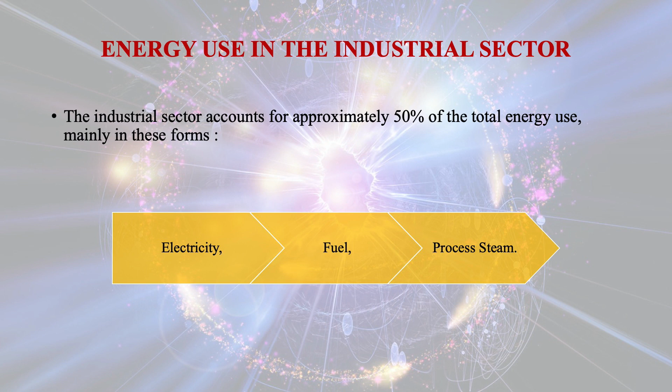Now let us discuss about classification of industrial energy use. Standard industrial classification: primary metal industries, chemicals and allied products, petroleum refining and related industries, food and kindred products, paper and allied products, stone, clay, glass and concrete products.

Major energy intensive industries are aluminum, ammonia, cement industries, iron and steel industries, paper industries, petroleum and refining, and sugar industries.

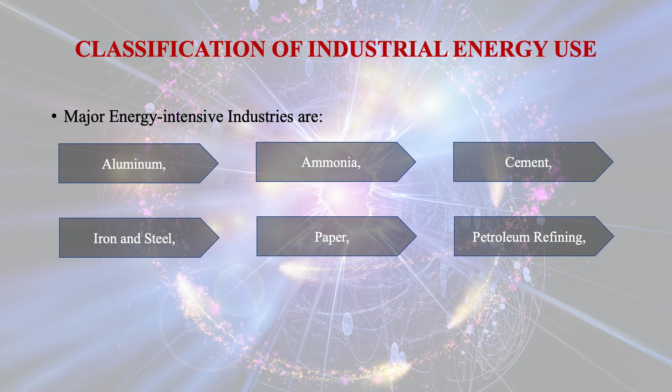The two oil crises in 1973 and 1979 were chiefly responsible for bringing energy management into the center stage. As a result of this crisis, the cost of energy, particularly relating to fossil fuel, increased substantially, and strategies for decreasing the energy intensity of industrial operations without affecting the output have been developed.

Since early design of machines and operations were not energy efficient, there is a lot of scope for energy saving in all the sectors.

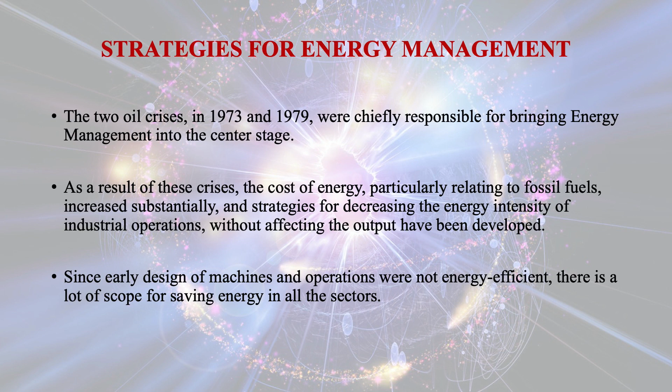In terms of the investment required, the major strategies for energy management may be classified under three heads: low cost or no cost strategies. These include good housekeeping measures, plugging leaks, avoiding wastage, and fine tuning equipment, etc. Moderate cost strategies. These involve minor expenditures like modifying designs or operation, replacement of worn out insulation or equipment, etc.

High cost strategies. These incorporate major expense to achieve large energy and money savings, such as introduction of waste heat recovery devices like heat exchangers, process parameters change, replacement of obsolete equipment by modern ones, etc.

There are two main approaches to energy management at the national level. Either the supply of energy has to be increased or the demand for energy has to be decreased. These approaches are not independent of each other. The demand for energy can be decreased by discouraging demand through enhancement of prices, the belt tightening approach. By reducing energy consumption through improved efficiency of energy utilization and through reduction of energy wastes, the leak plugging approach.

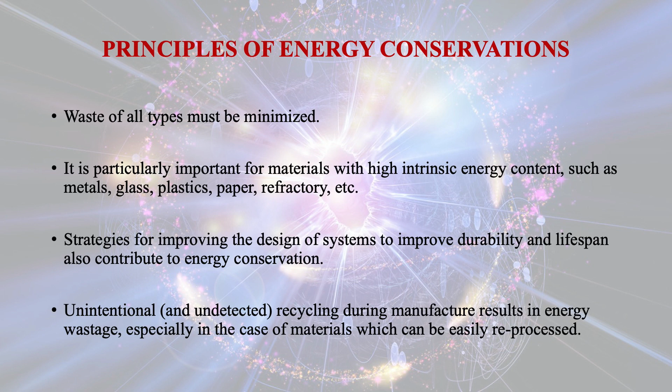Even though industry benefits greatly by conserving energy, recommended conservation procedures are often not implemented due to certain practical drawbacks such as cash flow problems, payback period longer than 2 years, resistance to change from management and labor, lack of commitment from the top management, and the cost of energy being a small fraction of total cost.

The fact of the matter is that while the former involves work to heat conversion, the latter involves the sequential conversion of chemical energy of fuel to sensible enthalpy of steam to mechanical work and ultimately to electrical work. The second law permits 100% conversion of work to heat but limits the efficiency of conversion of heat to work to a value which is less than 100%. The actual value is dependent primarily on the heat source and sink temperature.

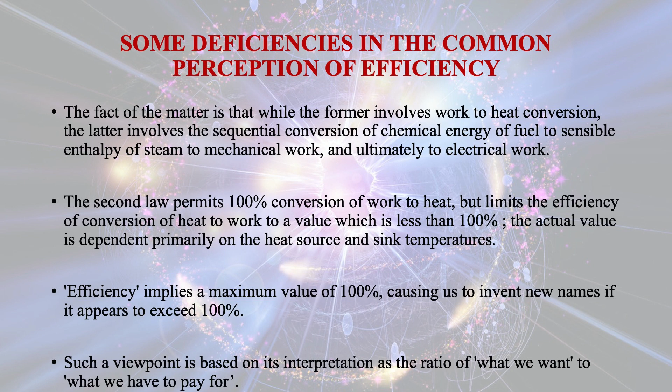Efficiency implies a maximum value of 100%, causing us to invent new names if it appears to exceed 100%. Such a viewpoint is based on its interpretation as the ratio of what we want to what we have to pay for. For example, the parameters for assessing the performance of electric refrigerators and heat pumps are designated as coefficient of performance since they can and usually have values greater than 1.

Although it is intuitively clear, there are two explicit reasons for seeking high efficiency in power plant practice. The higher the efficiency, the smaller is the quantity of fuel required to accomplish a given task, thus resulting in lower cost for fuel, slower fuel resource depletion, and less environmental damage in the extraction and combustion of the fuel.

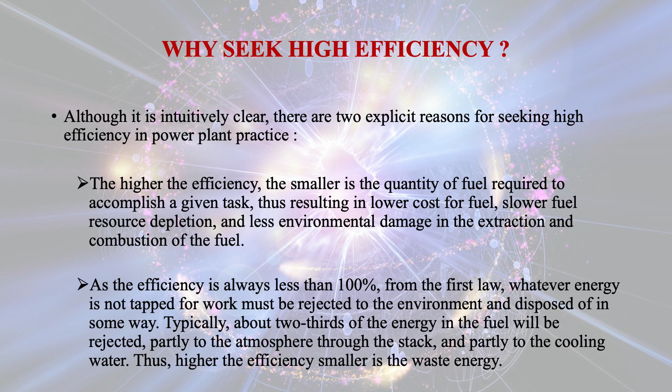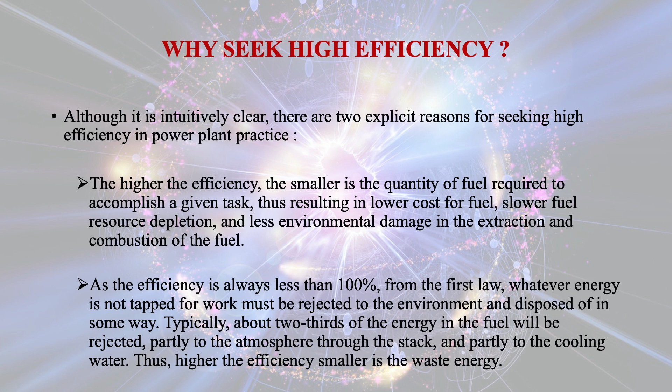As the efficiency is always less than 100% from the first law, whatever energy is not tapped for work must be rejected to the environment and disposed of in some way. Typically, about two-thirds of the energy in the fuel will be rejected partly to the atmosphere through the stack and partly to the cooling water. Thus, the higher the efficiency, the smaller is the waste energy. The thermal pollution from nuclear power plants is greater than that from fossil fuel fired power plants.

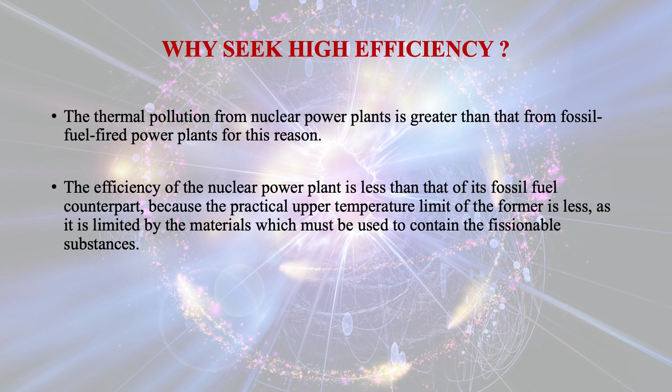For these reasons, the efficiency of the nuclear power plant is less than that of its fossil fuel counterpart, because the practical upper temperature limit of the former is less, as it is limited by the materials which must be used to contain the fissionable substance. For example, for an identical power output of 500 megawatt, assuming an efficiency of 40% for the fossil fuel plant and 30% for the nuclear plant, a reduction of 25%, it can be shown that the heat rejection in the latter case is higher by 56%.

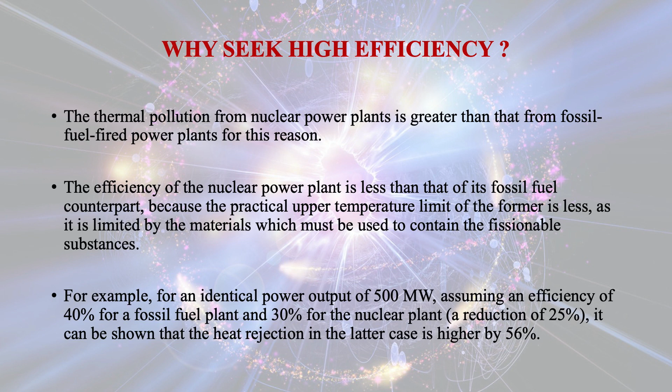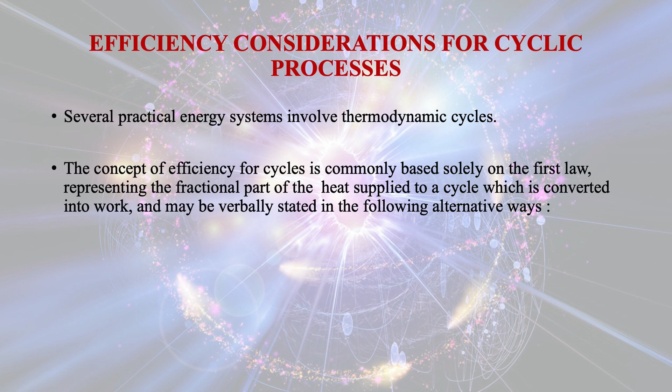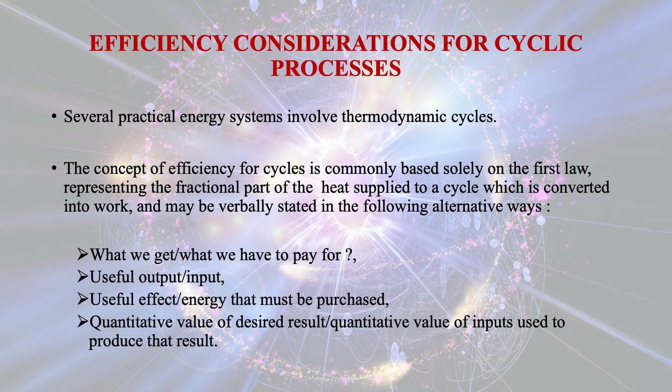Several practical energy systems involve thermodynamic cycles. The concept of efficiency for a cycle is commonly based solely on the first law, representing the fractional part of the heat supplied to a cycle which is converted into work, and may be verbally stated in the following alternative ways: what we get divided by what we have to pay for, useful output by input, useful effect by energy that must be purchased, quantitative value of desired result divided by quantitative value of inputs used to produce that result.

Now let us talk about efficiency for non-cyclic processes. The compression efficiency is applied to pump or compressor and defined as efficiency is equal to isentropic work by actual work. The expansion or engine efficiency is applied to a work producing process, that is, efficiency is equal to actual work divided by isentropic work.

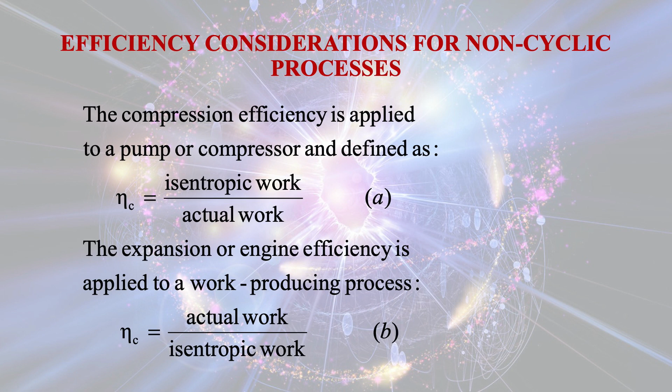It is noted that the efficiency employed in the above discussion is based just on the first law of thermodynamics. No second law implications are considered. In general, the first law efficiency may be described as the ratio of energy transfer of the desired kind achieved by the device to the energy input to the device as defined above.

The first law efficiency has the following shortcomings. Its maximum value may be greater than, equal to, or less than 1 depending on the device and on temperature. It cannot be readily generalized to complex systems in which the desired output is a combination of work and heat, as in cogeneration systems. This is because to the first law, work and heat are equivalent both quantitatively and qualitatively.

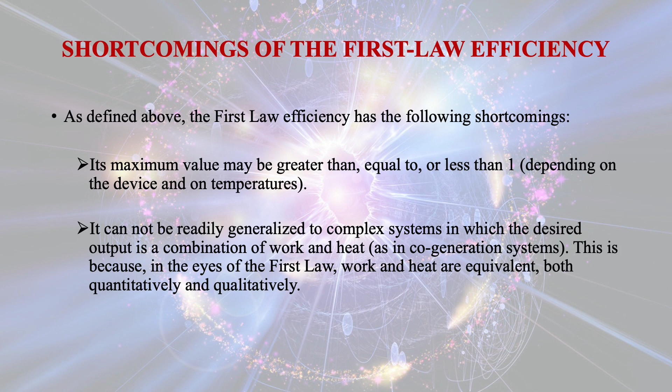Now let us discuss the nature and scope of energy audit. Energy audit involves 3 steps: measurement of energy use and cost, and reporting it as energy and money accounts. Second one, presentation of accounts to compare actual energy use and cost with predicted or standard amounts. The last one is interpretation of accounts to identify areas which need remedial measures to reduce energy usage and cost.

It is pertinent to quote one of the principal conclusions of the 1989 World Energy Conference in Montreal. Fossil fuels will continue to meet most of the world's growing energy demand. We should therefore be committed to using them more rationally. This requires a thorough understanding of combustion phenomena, meticulous design of combustion devices, and fine-tuned operation of the combustion equipment.

One of the greatest opportunities for industrial fuel conservation is provided by improved combustion efficiency of the fuel burning equipment in energy systems such as boilers, process heaters, kilns, dryers, incinerators, steam generators, etc. And the most important factor in optimizing combustion is to ensure that the proper mixture of fuel and air is supplied to the combustion process.

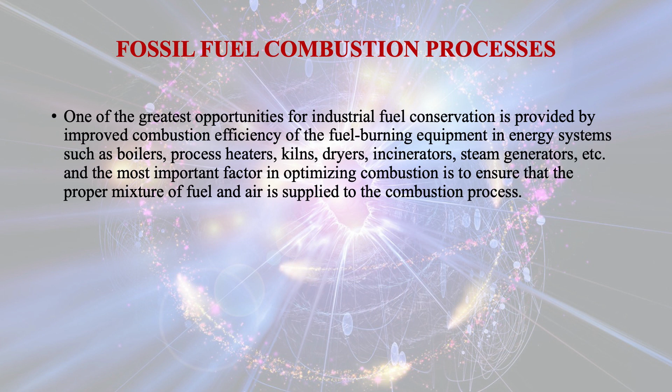Indian power sector is undergoing a significant change that has redefined the industry outlook. Sustained economic growth continues to drive electricity demand in India. The Government of India's focus on attaining power to all has accelerated capacity addition in the country. At the same time, the competitive intensity is increasing at both the market and supply sides.

Wind energy is estimated to contribute 60 gigawatt, followed by solar energy at 100 gigawatt by 2022 and 15 gigawatt from biomass and hydropower. The target for renewable energy has been increased to 175 gigawatt by 2022. Total installed capacity of power stations in India stood at 371.977 gigawatt as of 31st July 2020. Coal-based power generation capacity in India, which currently stands at 205.13 gigawatt as of March 2020, is expected to reach 330 to 441 gigawatt by 2040.

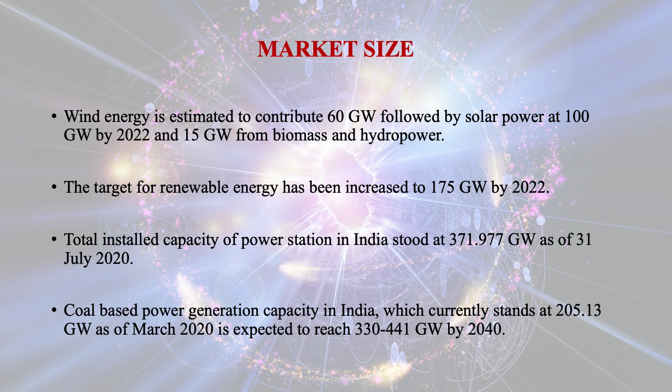So we have discussed our lecture sessions on significance of power. Now let us very quickly summarize our discussion. We have discussed the significance of energy for national economic development. We have discussed the principal energy uses in different sectors, the different types of industrial energy use, the role of energy conservation strategies. We have discussed the common barriers to energy conservation, and we have also discussed the significance and limitations of the concept of efficiency and the role of energy audit in the conservation of energy.